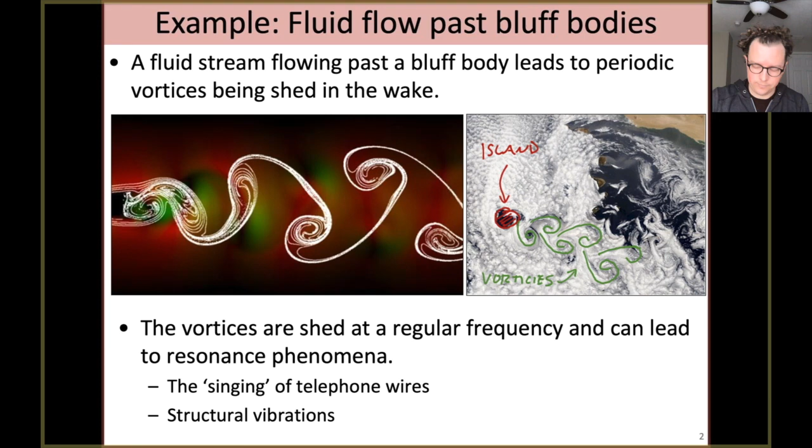This is exactly the same process that might cause that singing sound to appear from telephone wires. It's the same process that causes these vortices to form and be shed from the islands. And it's one that caused huge problems for this Tacoma Narrows Bridge and required pretty expensive and intensive solutions after the fact. So the question then that motivates us is, how does this happen? And what if we wanted to learn something about this?

So what you can see here is at the bottom of the screen, we've generalized the idea of a beam with wind flowing past it. So think of that velocity and that set of arrows as representing wind, and our beam with dimensions h in the direction of flow and d in the direction perpendicular to flow. Let's see if we can describe the way that fluid interacts with a bluff body and the oscillations that result.

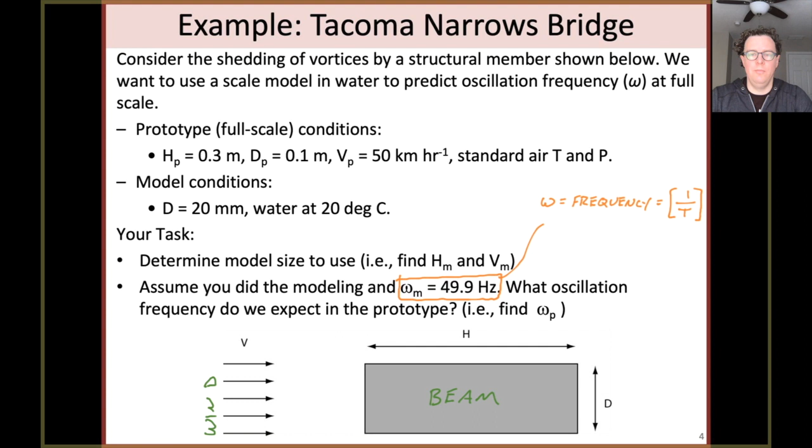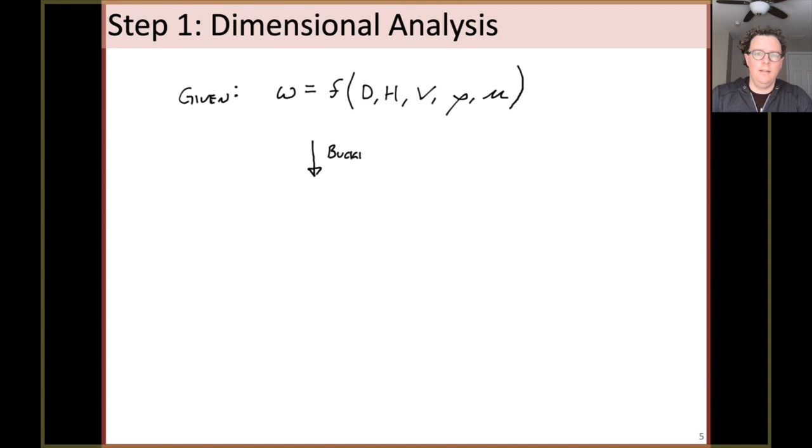All right, step one of this problem is dimensional analysis. So in the problem setup, we were given some of the information that we need, and you can see here I've got the geometry of the problem, the external effect of the velocity, and the fluid properties. And using Buckingham's pi theorem, we can come up with this non-dimensionalized relationship. Now, I want to note here, I'm not showing the work, but this is a great opportunity for those of you who need more practice with Buckingham pi theorem to make sure that you can recover the same pi terms that I've recovered.

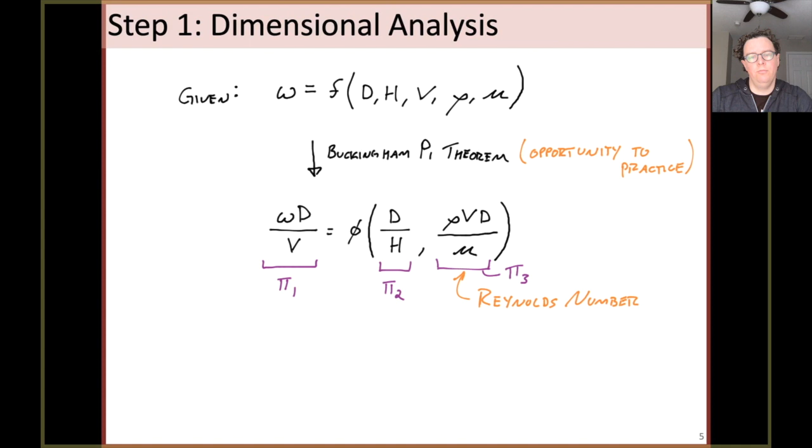And just for those of you keeping track of this stuff at home, yet again, Reynolds number shows up as one of these really critical relationships between moving fluids and bodies that are moving through them, or that fluid is moving around. So that's our non-dimensionalization step complete. And in the future slides, I'm going to refer to these pi terms as pi 1, meaning the dependent pi term, pi 2, the one shown in the middle, the sort of ratio of depth to width of that bluff body, and Reynolds number as pi 3. So our first task was to find the geometry and velocity that should be used in the scale model.

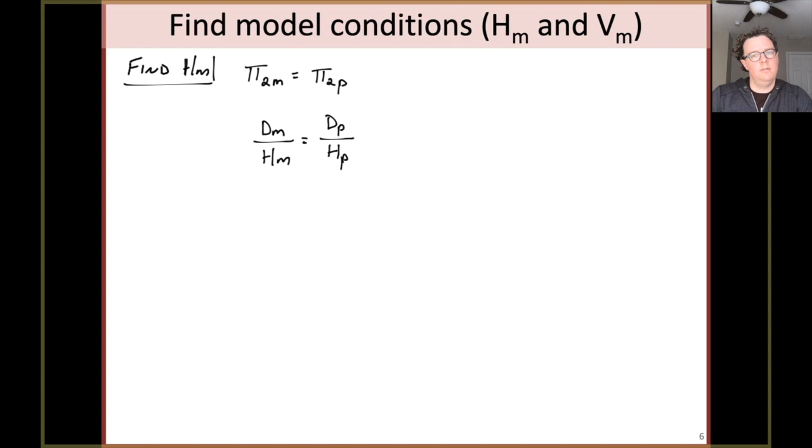So let's start with the geometric piece. Looking at our pi terms, the easiest one that will have a depth, or a width h in it is pi 2. And so you can see I'm setting pi 2 for the model equal to pi 2 for the prototype. In other words, depth to width for the model on the left-hand side should equal depth to width for the prototype on the right-hand side.

Now from there, I can plug in the given information. I know I have a depth of 20 millimeters in the model, and I know both dimensions for the real beam. Now, one thing that you can always confirm here, and should confirm, is that the left-hand side and the right-hand side are both unitless. Now, that's a little bit troubling to some people out there, perhaps, because you see I've got millimeters on the left and I've got meters on the right. But in fact, the left-hand side is millimeters per millimeter, and the right-hand side would be meters per meter. So both sides are unitless, and we can set them equal to one another.

So you really need to be careful with your units here. The safest thing to do is convert everything into the same units. So perhaps you would pick kilograms, meters, and seconds. But you can sort of check your work and make sure both sides are unitless, and this will work out just fine. So solving this, I get HM, or the width that should be used in the model, of 60 millimeters.

Now we're going to do something very similar to find the velocity that we should use in the model. So we'll set pi 3 for the model equal to pi 3 for the prototype. In other words, Reynolds number for the model should equal Reynolds number for the prototype. And we can go ahead and look up values for the fluid properties here for water in the model side of the problem and air at standard temperature and pressure in the prototype side of the problem. All right, and we can scratch this stuff out.

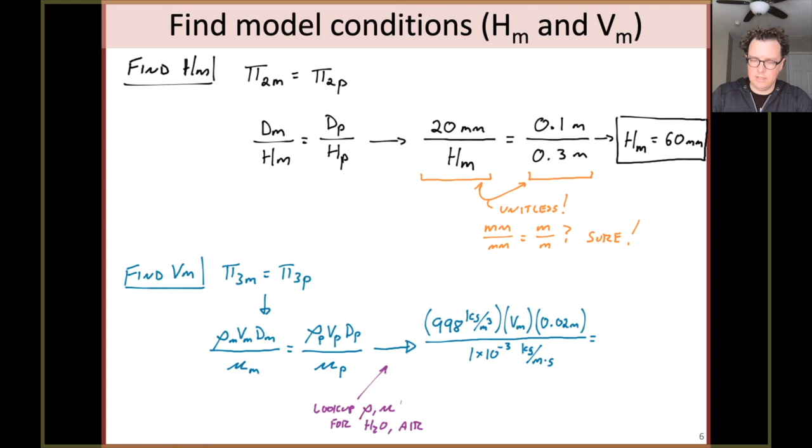So on the left-hand side, I've got the density of water in the numerator, the velocity of that water in the model, which we don't know, and the depth that we're going to use in the model. And in the denominator, I've got the viscosity of water. And similarly, I can fill in the right-hand side using the information about air and the prototype. So note here that prototype velocity was given in the start of the problem. So we know that this is how many meters per second the wind speed will be that we're trying to model.

And one thing that you might have noticed, and I've just written in purple, why not millimeters? Right? How come just above that in orange, millimeters were fine, and here I'm down to meters? Because I need that left-hand side to be unitless. So it was fine up in orange writing when I knew it was going to be millimeters per millimeter. But here, in order for the non-dimensionalization to work out, in order for all the units to ultimately cancel, I needed to use meters. So again, the key thing is that each side of that equal sign, you ought to be checking each time that the units cancel out.

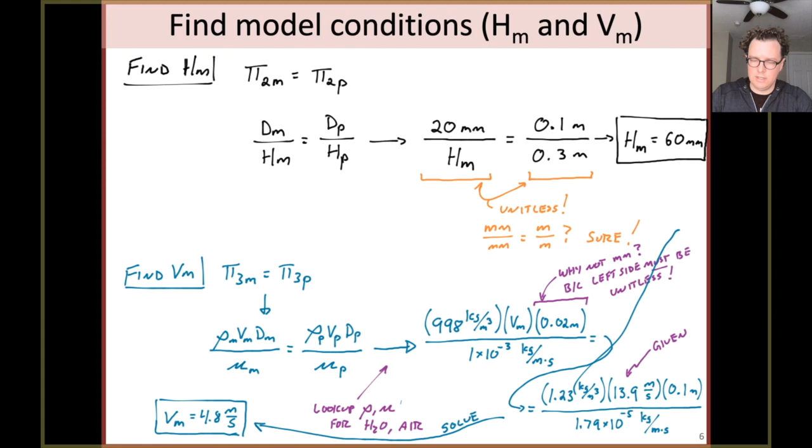So solving that problem, I end up with a model velocity of 4.8 meters per second. And you can see I've written that in the bottom left since I ran out of room. Okay. Finally, we're asked what oscillation do we expect to see in the real world when we do this? And so I'm going to take that first pi term for the model and set it equal to the first pi term for the prototype. In other words, frequency multiplied by depth over velocity in the model has to equal that same relationship in the prototype.

So we can go ahead and plug in the numbers that we were given. And again, this 49.9 hertz, this was given. You'll recall in the project setup that I said, assume you've done the experiment at the size and velocity that you needed, and you observed 49.9 hertz. So from here, you would predict that in the real world, in air with the specified velocity, that this would be the oscillation rate, about 29 per second.

So I find this stuff pretty awesome, right? The idea that this tiny model in a tank of moving water can somehow inform the way that this full-scale beam is going to work with fast air flowing past it is super cool. And in this example, I want you to notice that it is absolutely fine to switch fluids. So you don't have to use air when you're studying this.